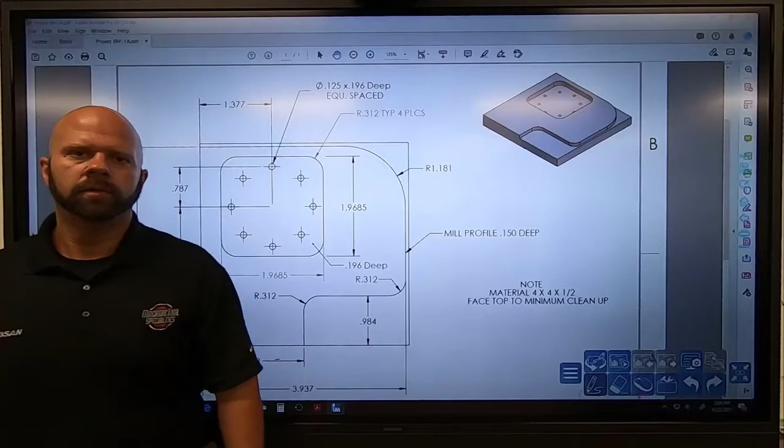We'll be covering all three lectures from our Blackboard: how to start the program, how to do the facing, the profiling, the pocketing, and we're going to go over holes. For the hole locations, we'll use the third method for trigging out the hole locations. Once that's done, we'll have all our code, and I'll show you how it should look when it's all run.

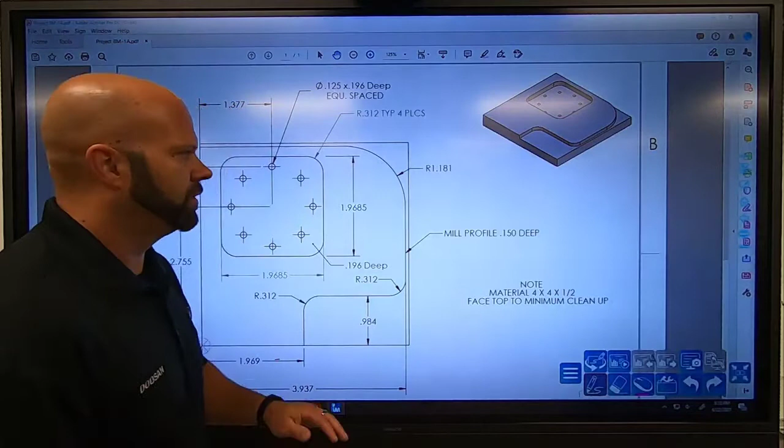So what I'm going to do right now is show you what we're going to be making. I'll teach you how to take this part and program all the tool path. We're not going to do the excess, and I'll explain what the excess is here in just a minute — I'll let that be up to you on how you want to do that.

We're going to take a standard program and go over how to face the part, then I'll give you a safe start location on how to profile the part. After profiling, I'll teach you how to safely enter the pocket with a ramping style — I'll be using the zigzag ramping style — and then I'll show you how to trig out the hole.

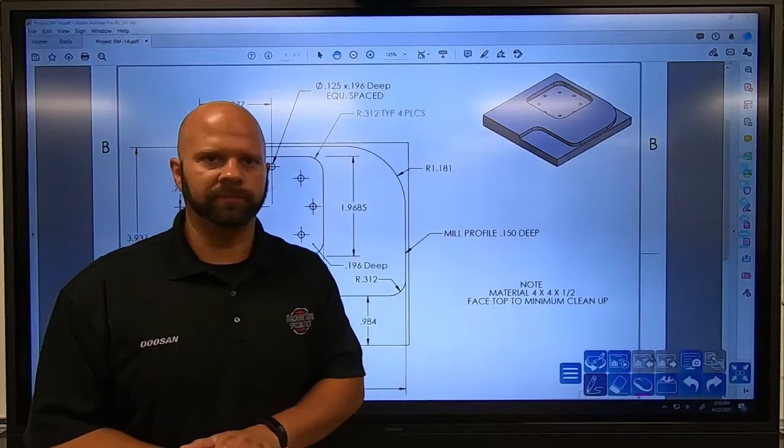All of these will be found in your programming workbooks, and examples are also found in the other lectures, so you can use this as well. Yes, you will find all the answers to your program, but please use this video as reference to help you understand how to program, because the next part you program there won't be a video for.

So let's get started. The first thing I want to do is take, we'll say, a 3-inch face mill, and go ahead and go across this part at Z0.

The first thing I want to do is come to my part and start at the percent sign. So the first thing I have at the top of my program will always be a percent sign.

What that does is let the controller, when you input your program, know it's looking for a percent sign — not a space. The first thing you have at the top of your file is a percent sign.

So this next code can be from 0001 all the way — I'll put this in parentheses — all the way to 7,999. The reason why is that 8,000 to 9,000 programs are usually protected programs in your machine, so I don't want anybody using those. So I'll go ahead and erase that.

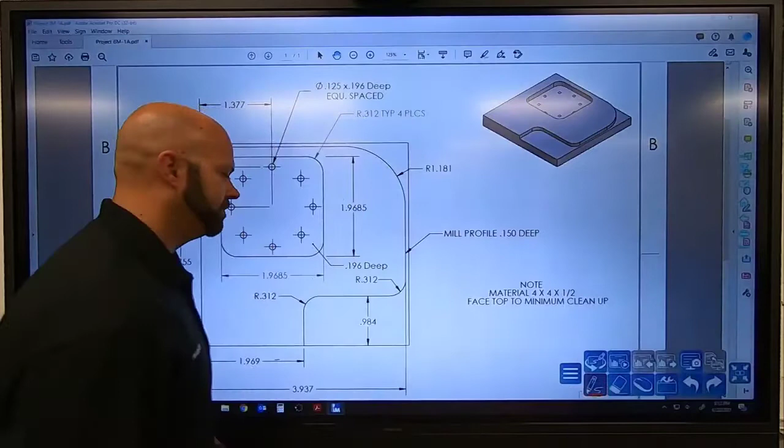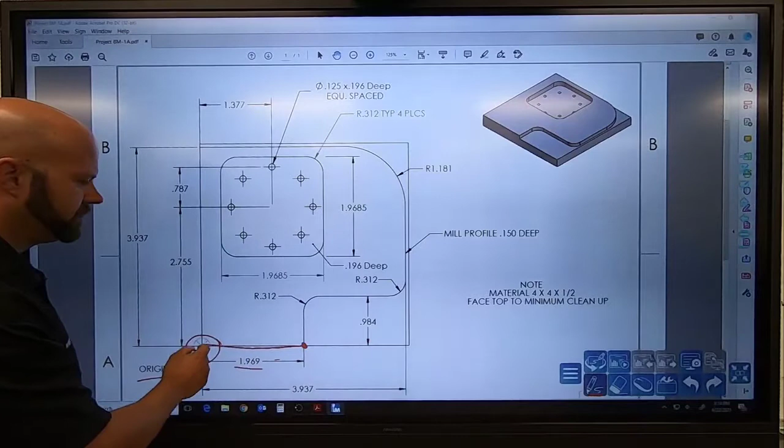Let me show you why I picked that location. If you look here, you'll see I have an origin — that's where all my dimensions are coming from. For example, if I wanted to come to this location in X, I'll move that dimension over, because that is the location of this point in relation to origin. That'll make sense as we go along.

Back to here, I'll also put in parentheses: Z0 top of part. Now if you're thinking, hey, if Z0 is the top of the part and I go across it at Z0, I won't take off any material...

I will also show you what to do from there. So I've got a pretty basic start here. I've got my O number, I've got my XY0, which is the bottom left corner of my part, and I got my Z0 as the top of the part.

That helps me as I'm programming it, and it helps the operator when they're setting it up. So the next thing I want to put on there is I want to go ahead and call up the tool. However, what I usually like to do in my programs is I give it an M01. What that does is it tells the machine to stop, and it lets me know what's going to happen. So M01, I'll put a tool description. I said a 3-inch face mill.

3-inch. Remember, see this decimal right here? Do not forget about your decimals and their locations, because that can make a big difference. I will also explain that. So I'll just put face mill.

And then I'm going to start giving my machine a lot more codes. Here's where you want to start paying attention, all right? This is kind of a basis, but the next few lines I'm going to show you are the several lines that you'll have at the beginning of every tool.

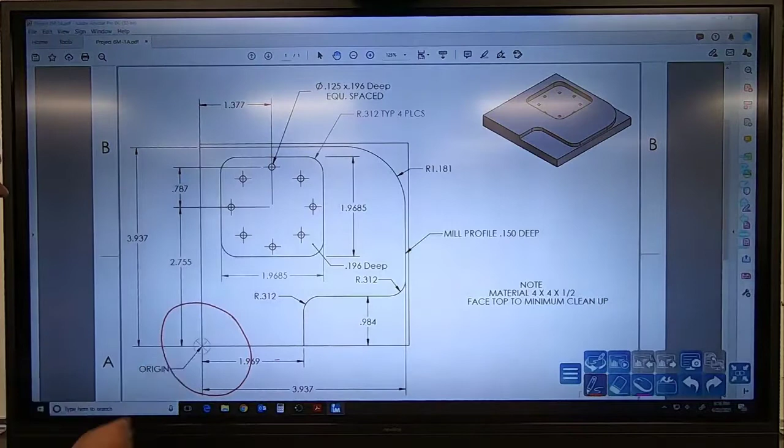Then from there, I'm going to go ahead and I'm going to send it to a location. Now, where am I going to send it? I have a 3-inch face mill. If I send it to XY0, it's going to put the center of my tool right over the top of it. So when I come down on top of it, it will slam on top of my part. I don't want to do that.

So this would be Y. See if it'll let me write on there. This will be Y plus direction going up. This will be the X plus direction going that direction, all right?

So that means I want to put my tool in the X negative direction by more than half the diameter of the tool. So if it's 3 inches, 1 inch 500 thousandths will put the side of my tool right there, okay? So I can also come up. So I'm going to move it up 1 inch as well. I'll move it up about 1 inch. That way I can do this part in 2 passes. I know that it will clean all the way up, okay?

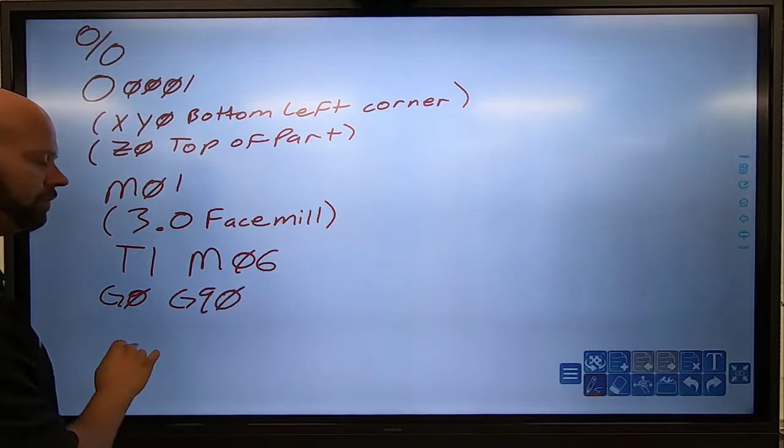So the next thing I'm going to do is I'm going to go rapid G0, absolute G90. We will always program in G90. My work offset, which is my origin location on the machine, and then I'm going to go in X minus 1.5, but maybe I want to go more than that, okay? So I'll just make that 600 thousandths. That way I still don't come down right next to my part.

And then I'll put a Y of 1 inch. If I go 1.5, there's a chance that the bottom of my part might not clean up. So I have a 1/2 inch overhang. That'll make a lot more sense as you see it run, all right?

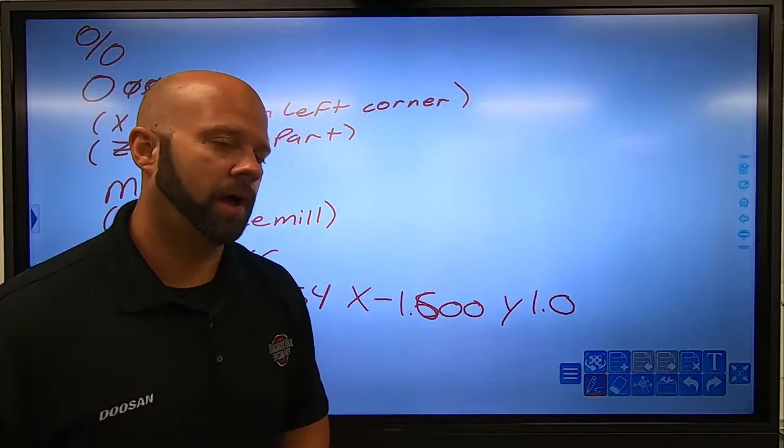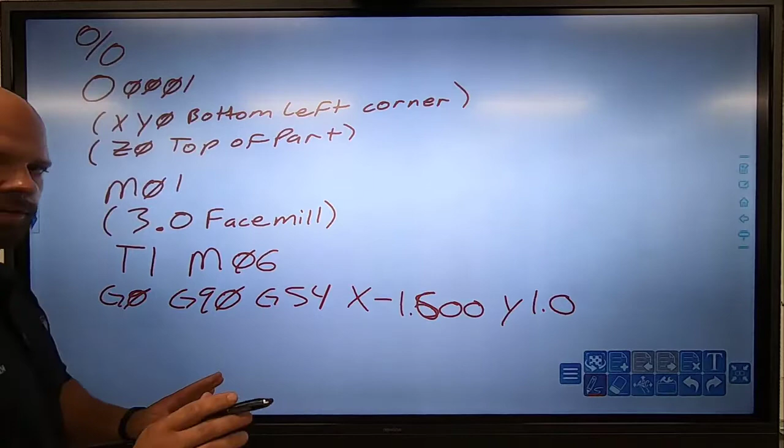So the thing I like to teach people is I've almost got all my starting points. So I'm gonna go to that location, and on this location line, it's up to you. I can turn on my spindle and tell it which direction I'm going, or I can put it on a separate line. For most examples you'll see, the spindle speed goes on this same line. So I will turn this on at 3,000 RPMs, and I'm going to turn on M03. That is a clockwise rotation.

The next line I'm going to put on there is my tool now knows where to go in relation to my G54. Now it needs to know how high above the part it needs to go. So it needs to pick up its tool length offset, and to activate the tool length offset, it is a G43. My H has to match my T, so H1, I'm going to give it a Z 1 inch above the part. That is a safe location for beginners. If you want to go 3 inches above the part, you can do that as well.

And then on this same line, I want to turn on M08. And of course, like I said, you'll see me forget those lines right there. Just always remember, no more letter O's in my program. So what you see right here is how every tool should look when it starts.

So even if the next tool gets done, I'm going to send the tool home. M01, tool description. Call up the correct tool, rapid it to a safe location.

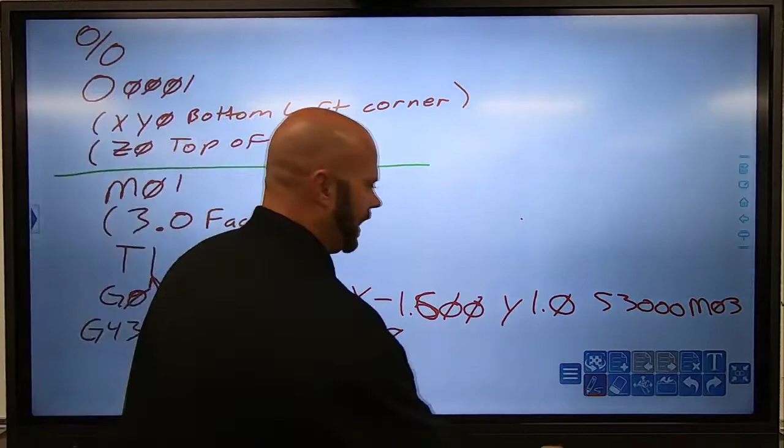All right, so here we go. I've got the beginning of what I want to do. This is how every tool will start. I'm going to go ahead and move my page up.

So right now, to give you an example of where we're at, I have a tool, my 3-inch tool above my part, okay? Obviously the tool's not to scale. So right here, that's where I'm at. I'm 1 inch above the part. Now from here, I want to lower down, 3 inches above it or 1 inch above it.

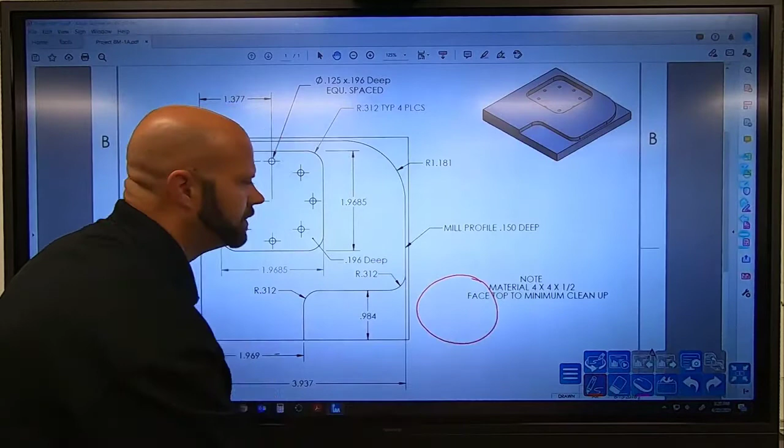I rapid in, now I want to feed to Z0. Once I'm at Z0, I want to move my tool completely across the part. So that G code will be G01. That puts me into a linear interpolation mode, pretty much making straight lines, okay?

I'm going to go Z0, and every time I have the initial G01, not every line, but the initial G01 when a tool starts, I want a feed rate. So I'm going to put a feed rate of 30 on there, and it's going to go into feed rate mode, so no more rapid. I'm going into feed rate mode to Z0, okay?

So now here's where we're going to go kind of fast because I want to get this program done. I'm going to move over off the part, so that will be an X plus move. My material is 4 inches plus 1.5 inches to go completely off the part. So that will be an X 5.5 inches. From here, I want to move up.

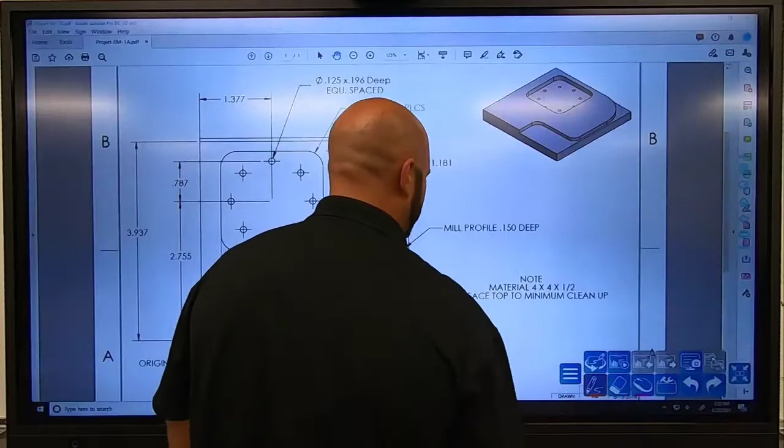So I will go a Y plus move, but how far do I want to go? I'm already taking off 1 inch off of a 4-inch piece. So I want to go up just enough to where it takes off, okay? So if I come back over here, I'll draw my tool. I've gone up 1 inch, okay?

So if I come up, I'm going to take my tool and I'll go ahead and put it up here at the edge. The reason why I'm doing that is because I know my profile tool will clean up any excess that I leave there. So I will simply come up from here.

I'll come up, let's say 2.5. So 1 inch plus 1.5 inches equals 2 inches, 500 thousandths. So I'll go Y, 2 inches, 500 thousandths. And then I'm going to come back across my part to where I started, which was X negative 1 inch, 600 thousandths.

Here's the best part. My facing is done. With these 1, 2, 3, 4, 5 lines we have right here, actually just like 4 moves, we have actually faced the entire top of the part.

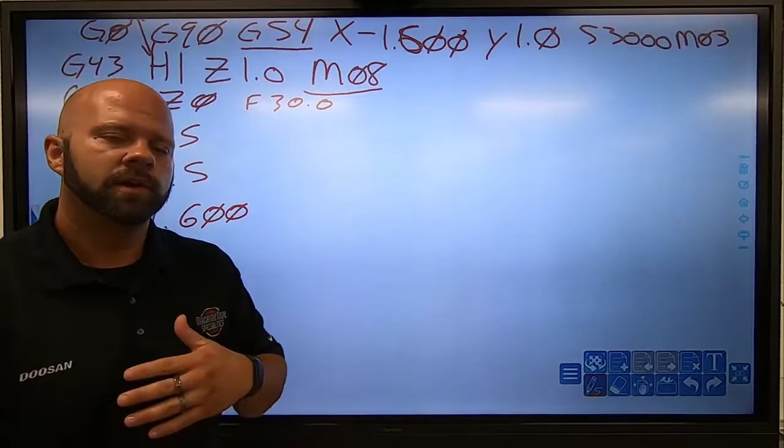So now when I am done making a part, I want to send it home. Now there are lots of ways to do it in your books. I'm going to teach you a way right here that will work on every machine that you run on, okay? So I'm going to teach you this right here. Let me scoot up a little bit.

I will go into rapid mode, okay? That means every X and Y move after this will be a rapid mode. G0 Z 1 inch, M08. I am now 1 inch above my part.

Now I'm going to go G91, G28, okay? From where I'm at, home location, I want to go Z0. G91, G28, Z0. That sends me straight home where I'm currently at. The very next line will be G53. That is the machine's location. I'll explain that later.

G53, G49, and then that's going to cancel off my tool length, and then I'll type in—and that should have been M09, I do apologize. Let's erase that. M08 turns it on, M09 turns it off. So I have that right there, and then the last thing I'm going to do is I'm going to put an M05.

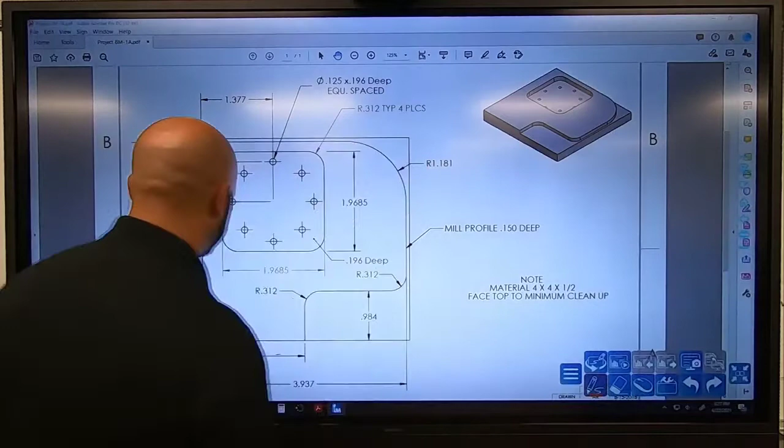Now on this one, let's kind of see where we want to put this tool at. For example, I have a tool, of course it's a lot smaller because it's a 1/2 inch tool and not a 3 inch tool. Looks about the same size.

But I don't want to start at X0, Y0, because when I come down, I will take out my part. Even if I'm feeding down to Z0, it will touch the top of the part. And if I feed below Z0, it will go across the part. So what I want to do, and the way I teach it, is I tell everyone to come off the part 1 inch total.

So I want you to come off an inch in X negative. I want you to come down an inch in Y negative, okay? So what that does is it puts me in a safe location so that I do not come off the top of the part. This will help for visualization when you start programming your part.

So what I'll do is I will go X negative 1 inch, Y negative 1 inch, and then again, I can turn on my spindle from this location. So let's go 4,000 because it is a smaller tool. And M03, it will always be an M03 unless you're using a left-handed tool. So M03 will turn on my spindle in the clockwise direction, all right?

So I have all my variables here. I'll go G43, I'm going to go H. My H and my T have to match. You can put a 2, you can put 02, but you cannot put 20 because then it thinks it's tool 20's tool length. We'll go Z, 1 inch above the part.

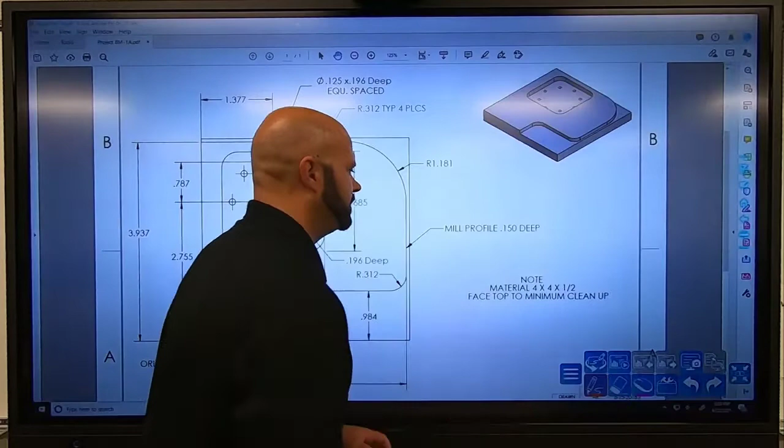I will come down. Now here's the thing: I don't want to come down to Z0 because I'm not facing off the part. What I want to do is come down 50 thousandths maximum depth of cut on this part right here, okay? That means I have to do 3 passes around this profile for me to be at the correct depth.

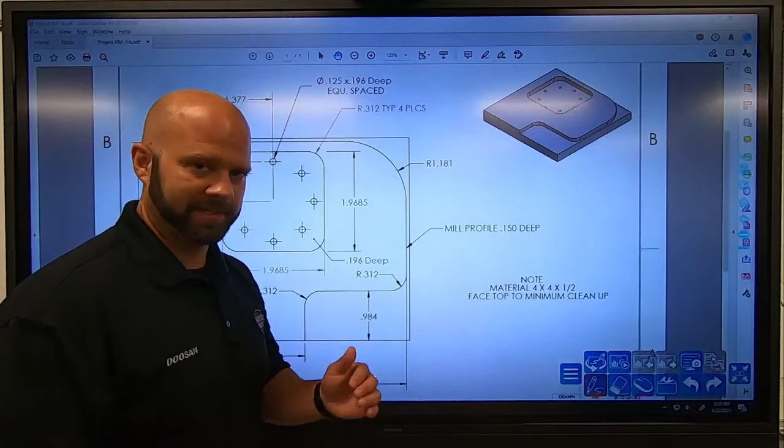So I don't want to start at Z0. I want to start at my first profile depth, which will be a Z negative 50 thousandths, because now I am below the top of my part. So Z will be a negative 50 thousandths.

Remember to put your decimal there, and remember that you have the numbers correct. The way I like to show people is to the 3rd place decimal. If you hide the decimal, that is 50. If the 5 was there, it would be 5. And if it was 500, it would be 500. The decimal makes you say thousandths. So that's how I have people learn, is by doing that right there.

So then I need, this is the first G01 that the tool has read. I'm going to put a feed rate, we'll say 50 inches a minute. So I've got my G01, I'm 50 thousandths below the top of the surface, and I'm at a feed rate of 50. So here's where stuff's going to get kind of tricky.

If you need to, pause and do a recap, because we're going to go over one of our first lectures, which is using cutter radius compensation. We have to turn it off if we turn it on, and in this case we're going to be moving more than the tool's diameter when we turn it on. If you have not watched those lectures, I need you to go watch them right now.

So what we'll do is I have my tool. I'm currently right here. So here's that rule of thumb I put on that last video, is when I turn on cutter comp, I am moving towards the line I am about to cut. I'm about to cut this line.

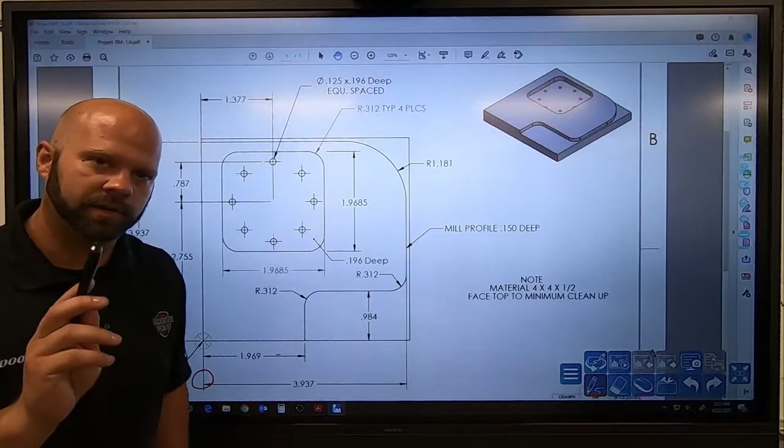But because we are turning on cutter comp, X0 will put the tool right there, because it's going to keep it half the diameter of the tool away from the line to cut. That's going to take a little bit to sink in, so don't expect it to just happen overnight with your understanding.

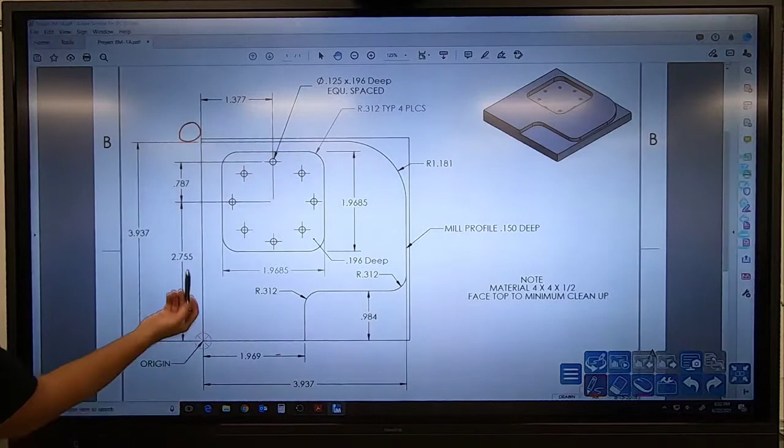Some people it will, some people have to watch the video a couple times. Don't worry. Just know that because cutter comp is on, I do not have to add a bunch of numbers everywhere. If my print says to move 3 inches 937 thousandths, that is what I'm going to type in. So the first thing I want to do is turn on cutter comp, and I want to move to a Y positive 3 inches 937 thousandths. So let's start there.

So I'm going to turn on G41 because I'm going to stay to the left of the line that I am cutting. Okay, that'll take some time to sink in as well. So, G41.

X0, D02. Now D02 is just like the H, and it's just like the T. So something to remember when you're using G43, you have to have the H on there. When you're using G41 or G42, you have to have the D. So remember, when you're typing these in, if you get an alarm, it's probably because you're missing one of those two variables.

So I have successfully turned on cutter comp, I have gone to X0, and I've turned on the radius value. So the next thing I want to do is I simply want to move to Y 3 inches 937 thousandths. That has now put my tool up to the top of the part.

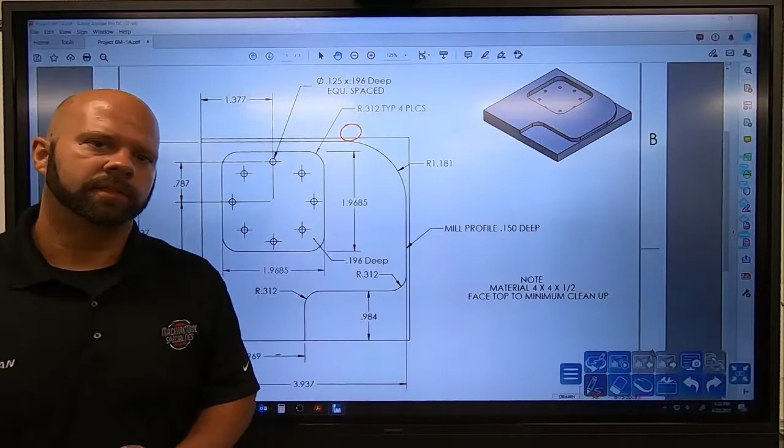The next thing we want to do is we want to go from that location to right there. Now keep in mind, I am at the pivot point on my profile.

Now I have taught people in the past, it's always a good idea before you ever start programming to go through all your pivot points and write down the X and Y location of those pivot points. Now remember, those pivot points are in relation to your G54.

So that means that pivot point that I was just at in Y is 3 inches, 937 thousandths, and it's gonna be up an amount right here, but we don't know what that amount is yet. So we have to figure out what that missing dimension is.

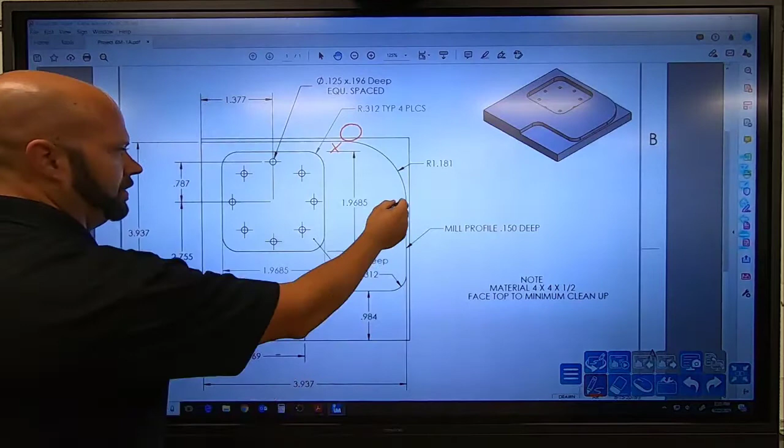So right here, my X value for this is going to be a known location in X, and I'm going to subtract this radius right here. The radius, I do know what that is. It happens to be right there on my print. So that means my X location will be 3 inches, 937 thousandths minus 1 inch, 181 thousandths.

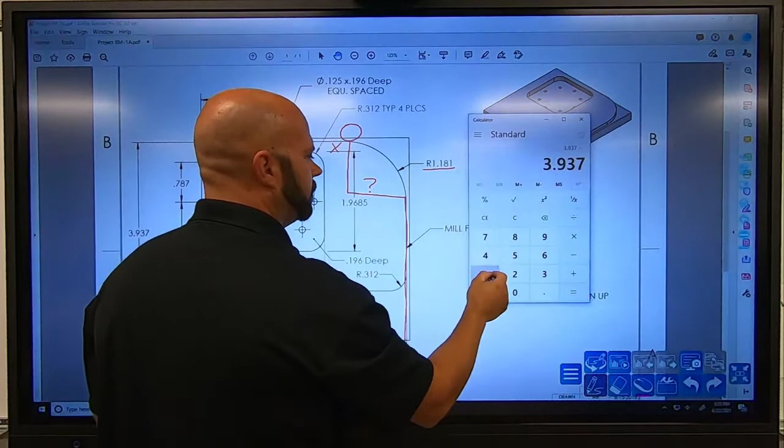So if we grab our calculator, we'll go ahead and type that in. So I'll type in 3 inches, 937 thousandths, subtract 1 inch, 181 thousandths equals 2 inches, 756 thousandths. So that would be the X location for right here. So I'll go ahead and I'll type that. I'll do that up here so it's a little bit easier to see. Let's get rid of this because we know what that is now.

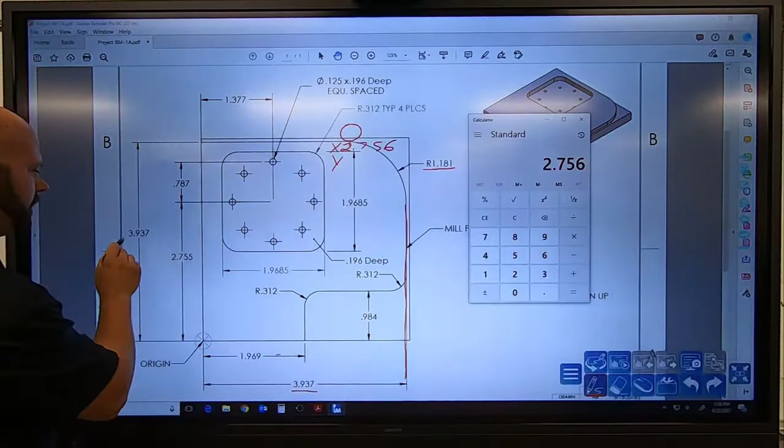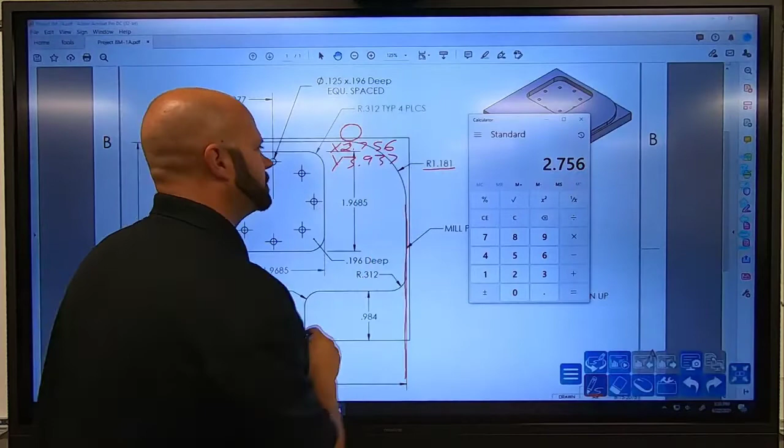X is going to be 2 inches, 756 thousandths. And then my Y is where we already are at, because we are already there right now. We are already at that known location, which means my Y is going to be 3 inches, 937 thousandths. If I'm already there, I do not have to have my Y on that line, because my tool is only moving in X.

Because it's only moving in X, you only have to put an X on that line. But if you have the Y on that line, it won't hurt anything. You just got to make sure that it is correct and that you don't get your numbers backwards, or else it will move to where you tell it to move.

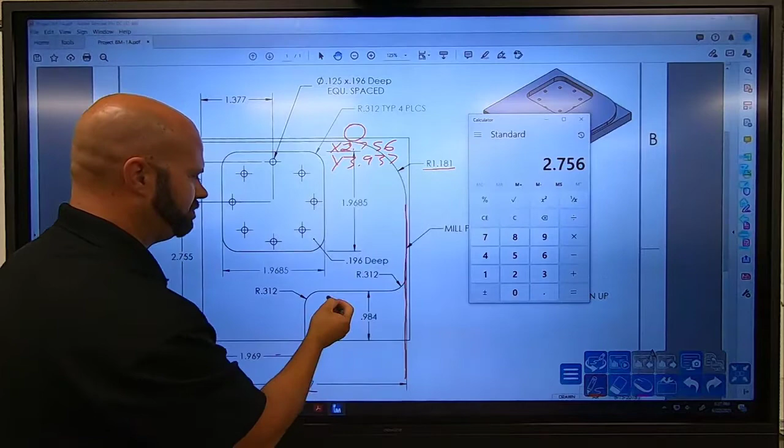Okay? So I would recommend that you go print this off and make a separate piece of paper and write down the X and Y locations of all these pivot points before you even start.

Okay? So all I'm going to do to keep it clean on my board is I'm only going to move, if I move in one axis, that one axis. So I'm going to move X 2 inches, 756 thousandths.

Now remember, these are linear interpolation moves. They're all straight lines. So if you want to, you can put a G01 on every line. But G01 is what we call a modal code, and that means you don't have to put it on every line. Once it's activated, it stays activated until you turn it off.

Now remember that, because I'm about to make a G0, 3 or 2, and we got to figure out what that is. So we'll come back to our part right here, and you'll notice my tool is going to move from here to there. That is making a clockwise rotation move, and clockwise is G02.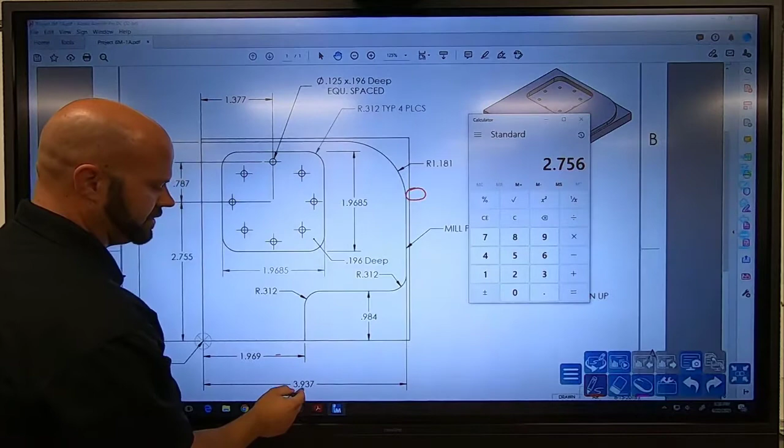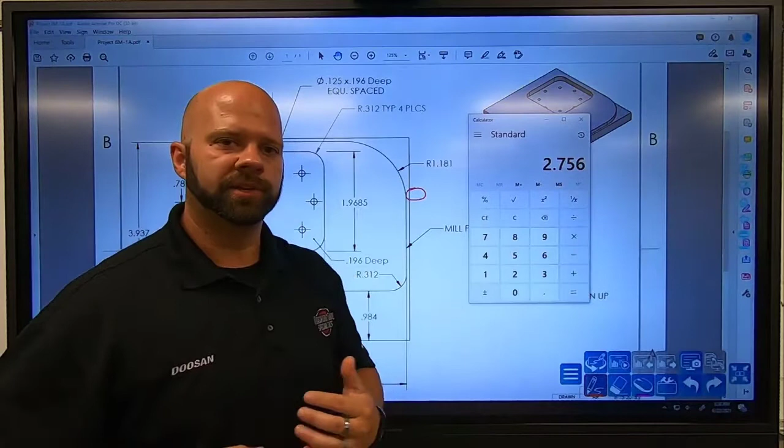Now here's the cool thing. I was X and Y up here. My Y was 3 inches, 937 thousandths, but now it's an X 3 inches, 937 thousandths. And now my Y is smaller. So my numbers have actually flip-flopped. It won't always work that way, but it's good to get that idea that I'm going from a known location, subtract the radius, puts me at my next X and Y location.

So I'm going to write that down, but before I do, once I complete this G02, I'm going to make a straight line, which means I will have to put a G01 at the beginning of the next line, or else it thinks that it's doing circles and will give you nothing but alarms, okay?

So I'm going to put a G02. My X will be 3 inches, 937 thousandths. My Y will be 2 inches, same one as my last one, 756 thousandths. Now on a G03 or a G02 line, you have to have the R, and the R equals the radius, and the radius was 1 inch, 181 thousandths. So if I had left the R off, it would have made a straight line, even though it has a G02 on there, and it would not have alarmed out.

However, if you put the R on there and not the G02 or 3, it will alarm out. So remember, they go hand in hand. If I have a G02 or 3, I have to have the R. So again, my next line will be a G01.

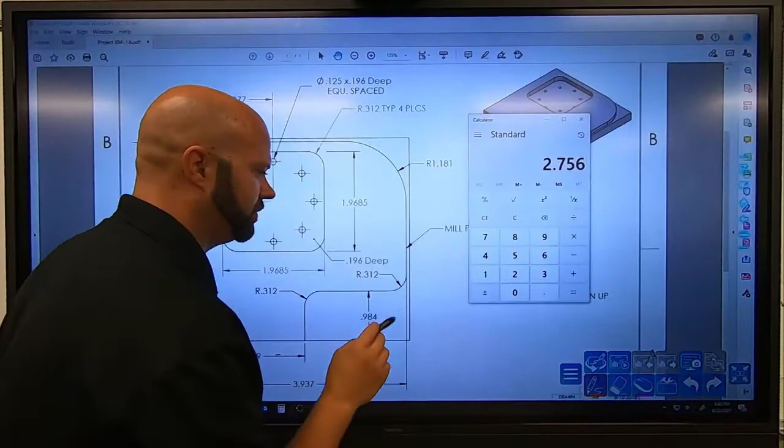And we're going to be moving down in Y, but we're not going to be moving negative. Okay, this is going to take a minute for it to sink in, but I am moving down in a negative motion. But remember, Y0 is this plane right here. So I am still in a positive quadrant. I'm still in a positive quadrant until I go into the negative quadrant.

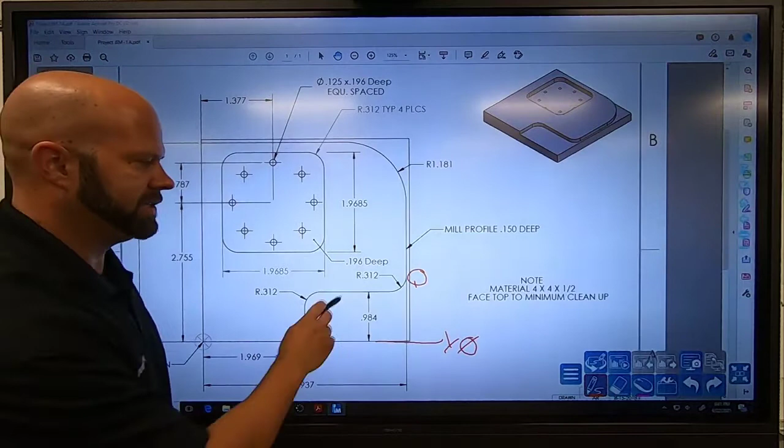So all moves right here will be a Y positive motion. So we're going to move right there before the radius, because that is a pivot point. Okay, we don't start at the bottom of the radius. You don't put the 984 in there. We're going to have to put that right there.

Now remember, this should be catching on pretty good now. I'm going to put the known location, which is my distance from here to there, and then I'm going to come up my radius, which is 312 thousandths. So I'll pull up my calculator and we'll type that in. It's going to be 984 thousandths plus 312 is going to be, that is my Y location.

Notice how it is in the plus direction. That is how I will plug it in. So G01, Y, 1 inch, 296 thousandths. You have to get this number right within 1 thousandths, and your swing value on the G02 and G03s within 1 thousandths, or it will alarm out on you. You cannot round to the nearest 10 thousandths.

Okay? So the next thing I'm going to be doing is I'm also going to be swinging a radius, but are we swinging a G02 or a G03?

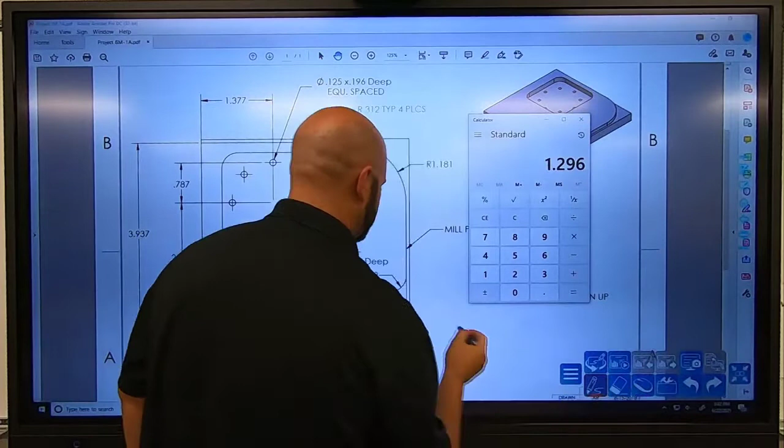So I will draw my tool, and if you'll notice, I'll be swinging in a clockwise direction around my part. So right there, I'm going to be swinging around my part, and then I can see that I'm going to be making another straight line, and I've got a pivot point right there. So that's where I'm going to be stopping.

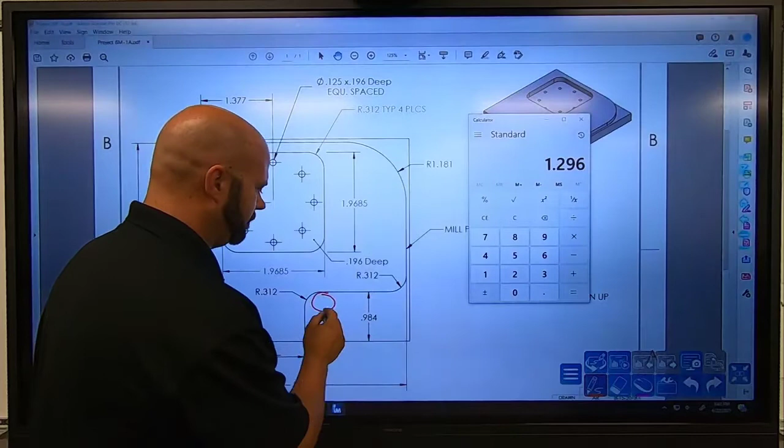So what I need to do is figure out, I know what my Y will be. My Y will be 984, but my X will be a known location from where I currently was, minus the radius of that. So let's find out what that is. I'll type in where I currently was, which was 3 inches 937 thousandths, subtract 312 thousandths, equals 3 inches and 5/8, 625 thousandths.

So we're going to be swinging a G02. My X will be 3 inches 625 thousandths. My Y, we had that known location on the blueprint, was 984 thousandths - make that more like a 9. There we go. So I also have to have, what on here? If I have a G02 or G03, I have to have the R. The R has to match what it was on the print.

Okay, you can't put 1 inch 181 for every radius. So this was 312 thousandths. Now I was in a G02, which is a modal mode. Now I have to go back to a G01 modal mode. I'll be making an X move. So let's find out where I'm going to be putting myself. So that's where I was.

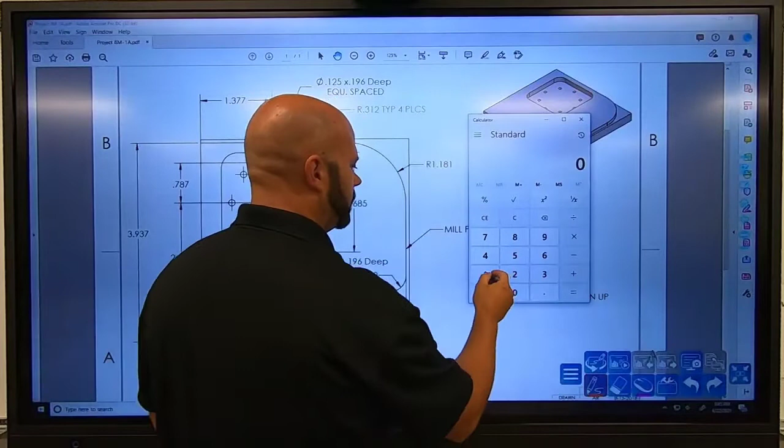Now I'm going to move to my next pivot point. My next pivot point in X will be 1 inch 969 plus the radius, or plus the dimension of my radius, which is 312 thousandths. My Y will not change, so my next line will simply be an X positive move because I'm still in the X positive quadrant. All up here is positive, positive, until I go into the negative, negative quadrant. So right there will be 1 inch 969 thousandths plus 312 thousandths, 2 inches 281 thousandths.

So my X will be 2 inches 281 thousandths. Let me make sure I type that in right. Very good. So after this line, I'm going to be making a G0 move, but let's find out if it's going to be a 2 or a 3. So I'll come back here. If you'll notice, now I'm swinging the other direction. I am making a counterclockwise motion, which will be a G03 move.

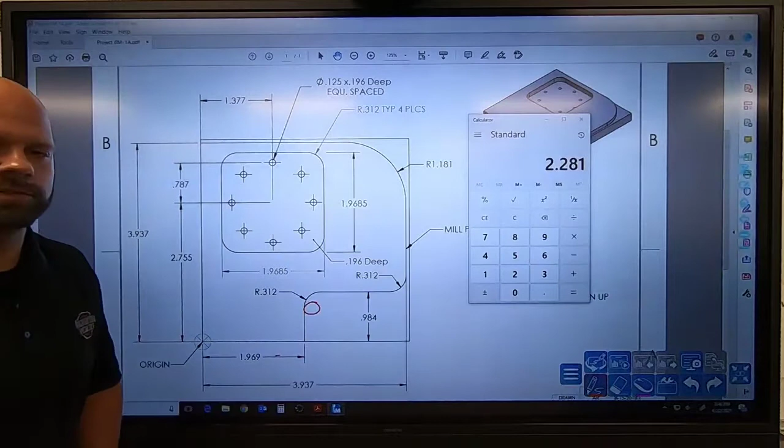So we know what the X is going to be. The X is on my print, but my pivot point for this position will be 984 thousandths subtract the radius, because I'm going here to there. So I'll go ahead and type it in. 984 thousandths subtract 312 thousandths equals 672. So that's what my Y will be.

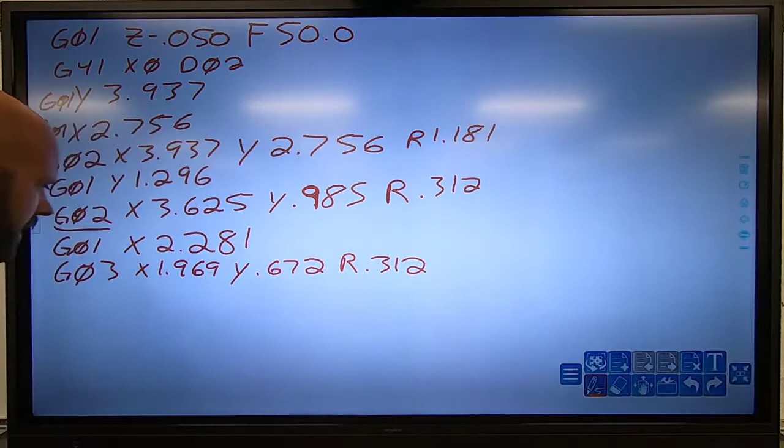So again, I'll be swinging a counterclockwise rotation, and then I will be going to X 1 inch 969 thousandths, and then I will be doing a Y of 672 thousandths. Notice how I'm still in the plus area, and I have a G03, and a G03 needs the R, 312 thousandths.

I know my next line is a straight line, so I can go ahead and put a linear interpolation modal mode code. At this point it gets pretty easy. I'm going to move my tool from right there to Y0. Now remember, without cutter comp on, that is Y0. On your offsets in the diameter column, if you have nothing set there, that is also Y0. You have to have cutter comp on, and you have to have your column set correctly, which I will show you.

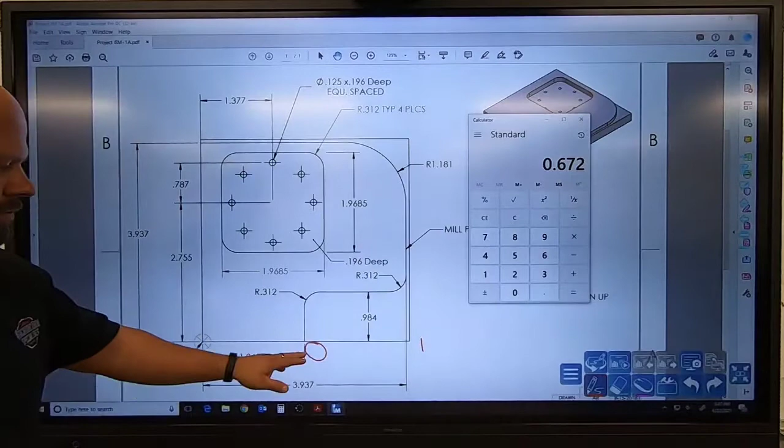So when I type in Y0, it will move to the center line, and then it offsets, cutter compensates half the diameter of my tool. So when I type in Y0, it will put it at the right location. So I know my next move will be Y0. I'll move this up so we can see a little better.

Now in here, I'm already at this bottom area, and what I teach is I want everyone to go back to where they started. This is going to be a closed loop profile. That will make sense, and it's very helpful once we get going. So I'm going to move all the way over here, back where we started, which was an X negative 1 inch. So I went all the way off the part, a negative 1 inch.

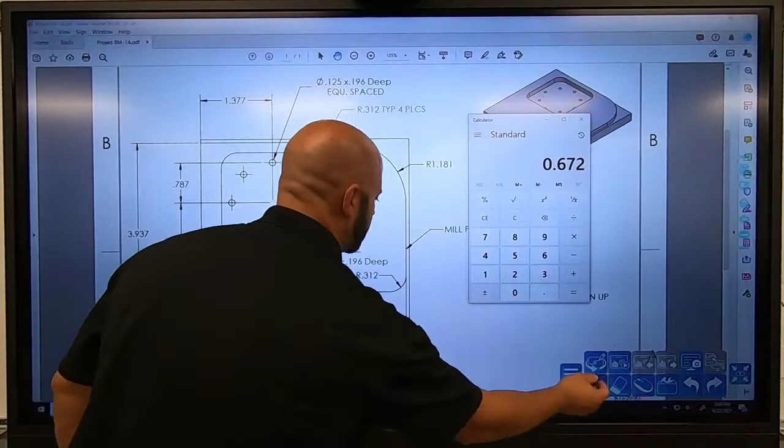So now I'm going to go X. Notice I didn't put a G01 on there because I'm making another straight line, and linear interpolation is already active. So X negative 1 inch, and then I've got something else going on here. I'm going to put it back to Y minus 1 inch.

Okay, but I'm missing something there, so I've got to find out what I'm missing, because I'm going to turn off cutter comp. In order to turn off cutter comp, if you'll watch the video before, I have to turn it off moving away from the line.

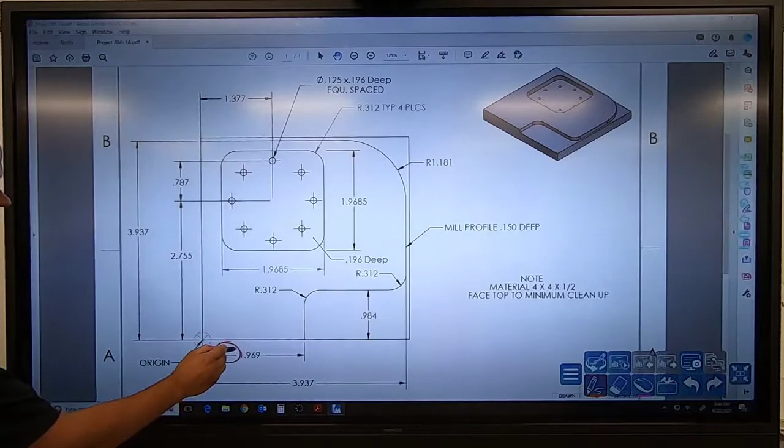Well, I'm having a hard time here, I apologize. There it goes. So I have to move away from the line I just cut. So I just cut this line, and then I'm going to turn off cutter comp, moving perpendicular away from the line I just cut. So I moved Y negative 1 inch.

And then I'm also going to be going G40. G40 and the Y need to be on the same line, because you want to move the diameter of the tool while moving away from the line you just cut.

So here's the good news. All this code that we just did, that's a lot, okay? So if you need to, you can take it back and watch it again. But if you'll notice, we did all of this code, this profile, at a minus 50 thousandths. So at this point, you can take this and pop it into your simulator and see if it runs correctly. If it runs correctly, you can move forward.

What I'm going to show you by moving forward is I want you to make this closed profile 150 thousandths deep, but I still have to go around it 2 times. So I don't want to write all that line of code twice. So here's where using a computer comes into play.

So from here all the way down, and I'll make my line a bit longer, to my G40, I can copy and paste, and I can put all that right below my G40. And then all I would do is change the Z to negative 100 thousandths.

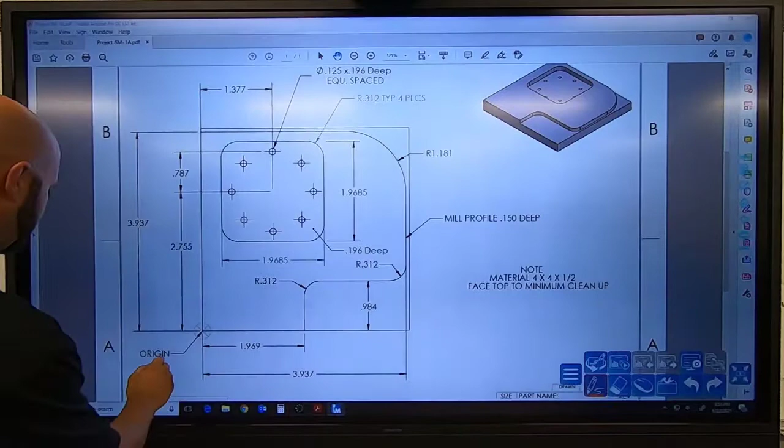If I was done using that tool, okay? But here's the thing, I'm going to use that 1/2 inch tool to go around my pocket. So I'll take my tool, which was right there.

And I'm going to position it right there. So I'm not going to send it home. I'm just going to come 1 inch above the part, and then I'm going to move to this location right here. However, this location - this will make a lot of sense as you do it - is going to become my new origin, but it can't be G54 origin, okay? It has to be a different work offset origin, which is G55. So G55 is now the center of my pocket.

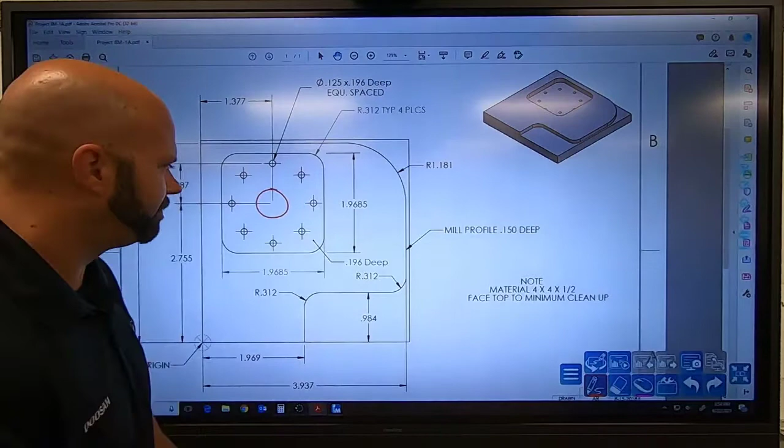So which means whenever I turn on cutter comp, I simply have to move the exact amounts that I want to move and it will work out just fine. So with that said, let's go ahead and go back to our code and adjust it accordingly. I'm going to erase because I don't want to use it yet, I don't want to send it home yet.

Okay, I want to go to the next tool or the next work offset. So I'm already in Rapid, but I usually type it in anyway because it's a good habit. G0, G90... wasn't very good. G55, okay? X0,

Y0. If I did not give my G55 the work offset and put it in the center of the part, you would have to add the difference from origin on G54 to the center of the pocket and then add that to your move. And it can get confusing really fast. By doing this, it lowers the confusion and it really does make it easier once you get used to it, okay? Once you get the hang of it.

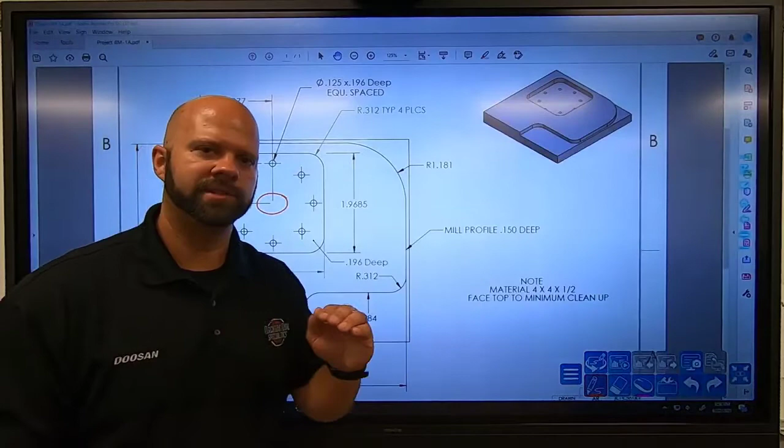So right now I have put my tool 1 inch above the part and I put it to G55 XY0 in the center of that pocket. So from here, I want to go ahead and ramp my tool. Now remember, this is the second lecture that we went over. This lecture is how to ramp safely into the part. So what I mean by that is I want to grab this tool and I'm going to zig, zag into my material. And as I'm zigging, zagging into the material, I'm only cutting with the edge of the tool because I can't plunge straight down. So watch that video if you need more explanation.

So on here, I'm going to feed linear interpolation, G01 to Z0, and I'm going to zigzag, and then I'll make 2 small squares, and then I'll make my finished profile, okay? So what I'll do from here is I'll go G01, Z0, that's the top of my part, and let's feed at a feed rate of 30, okay? Then I'm going to go zigzag, which means I'm going to move more than half the diameter of my tool. So I'm going to go X, let's say 300 thousandths, and then I'm going to lower down in Z negative 25 thousandths. That's my zig, okay?

You do not have to write that on your program, it's just for visual reference. And I'm going to come back to X0, which is the center of my pocket now. And I'm going to go down another Z negative 25 thousandths, but because we're in absolute mode, it's going to be my zag. I am now 50 thousandths, I'm absolutely 50 thousandths below Z0. So that means X0 back there. So now I'm 50 thousandths in my part. I'm safely in my part.

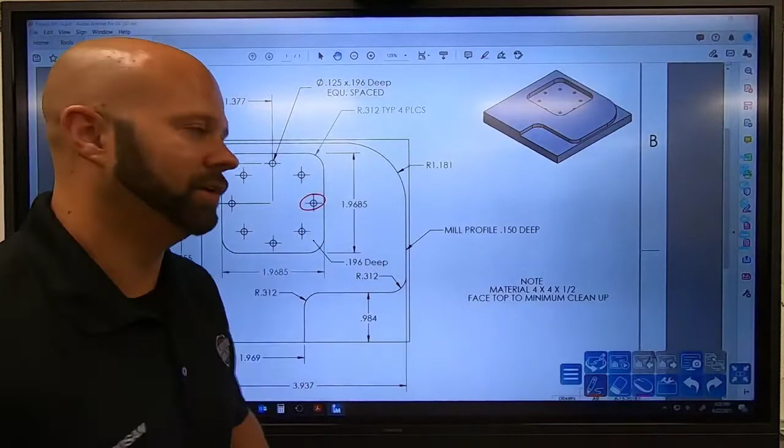Now I'm going to start making my pocket. So what I'm going to do is, because I've already got my tool and I know that I can safely move 300 thousandths, I'm just going to go 300, 300, 300, 300 back to 0, and then I'll move a safe distance over. I'm going to say 5/8 will work out pretty good, okay? So I'll go 5/8, 5/8, 5/8, 5/8, 5/8, and then I'll be done, okay, with my pocket.

So let's move up my part, because we know we're 50 thousandths in the bottom of my part. And then I'm going to start going X 300 thousandths, Y 300 thousandths, X negative, because I'm going into the negative quadrant now, 300 thousandths, because the center of my pocket is XY0. So if I'm on the left side of the pocket or the bottom side of the pocket, I'm in the negative quadrants. So then I'll go Y negative 300 thousandths, and then I'll come back to X positive 300 thousandths, and I'll come back up to Y0.

Okay, so that was quite a bit, pretty fast, but it's pretty simple. All I did was make a 300 thousandths square, and now I'm going to make a 5/8 square. Okay, so now I'm at Y0. I'll go X 0.625, Y 0.625, X negative 0.625, Y minus 625 thousandths, X positive 625 thousandths. I'm going to go back up to Y0, and then before I turn on cutter comp, this usually keeps me from getting any alarms.

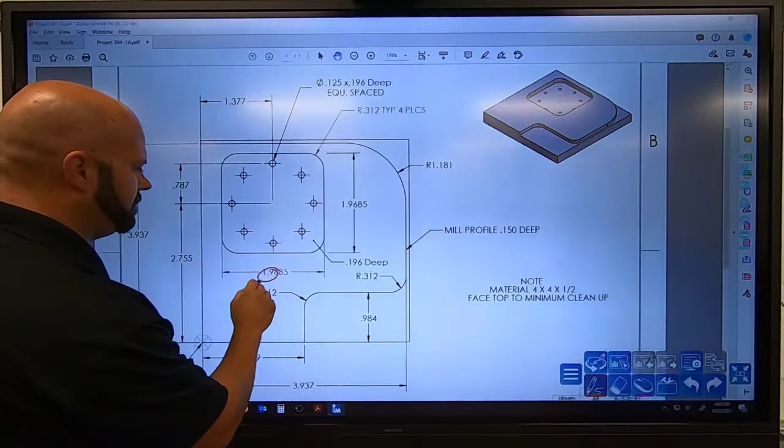Now I'm going to turn on cutter comp, which is G41, and then I'm going to go around this part. However, before I do, this would be a good time to stop and plot the pivot points on this part. Okay, the good news is my part is the same dimension wide as it is tall. So I'm going to grab two numbers and I'm going to plug them in on my whiteboard because I'll need these two numbers as I go around the part. This is where it gets kind of tricky. As I write them down, you'll have to try to keep up with it, and if you can't, just rewatch it and you'll get that understanding.

So what I'm going to do is turn on cutter comp, moving perpendicular to the line I'm about to cut, which is this one. So cutter comp on, and then I'm going to move to my first pivot point.

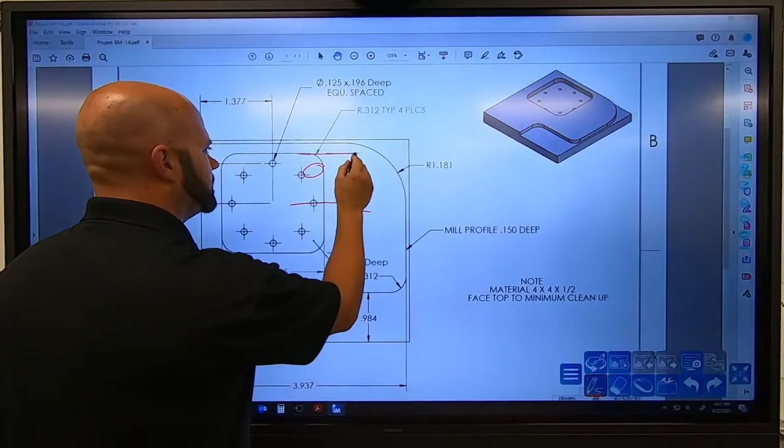That first pivot point is going to be 1 inch 968 thousandths divided by 2, because all I want is that distance, since this is where my origin is right now. So that distance, and then I subtract the radius, okay? Because from here to here, from here to there is that divided by 2, but I'm not moving all the way up there, I'm moving about right there. So that means I'm going to take that number divided by 2, and I'm going to have to subtract the radius.

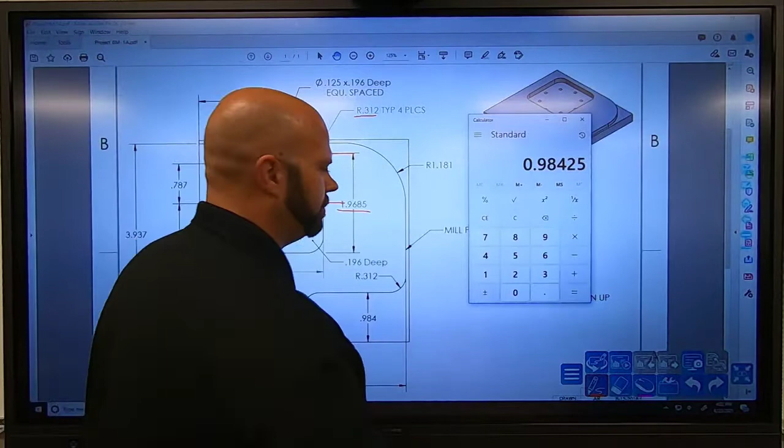So 1 inch 968 thousandths divided by 2. Okay, 984 thousandths. I want to write that number down. 984 thousandths, because that's going to be the top of my pocket, the far left of my pocket, the far bottom of my pocket, and the far right of my pocket.

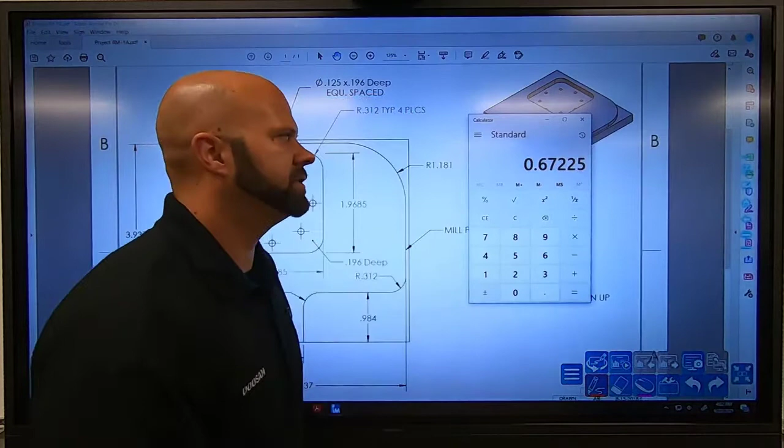Okay, so you do not have to plug in all the way to the last decimal on here. I want you to go to the third place decimal when you're using the simulators. You're less likely to run into error, because if you type in too many numbers, you can go to the fourth place decimal if you want, but if you go to the fifth place decimal, it will alarm out.

Okay, so from here, I want to write down 672 thousandths. So from here, let's turn on cutter comp left, which is G41, and then we're going to start moving to the right locations, okay? Keep in mind what quadrant we're in, and also keep in mind what radius we're swinging. Are we swinging a G02 or a G03? Let's find out.

We'll move this up. Right there looks good. So cutter comp G41 X, I'm going to move all the way to the side of the pocket, which is 984 thousandths. So remember, G43 needs the H, just like G41 or G42 needs the D. So I'm going to put a D, and if you remember, this is still tool number 2. I used H2 at the top. I will also use D2 right there. And anytime I'm using the T2, the H2, the D will also be 2.

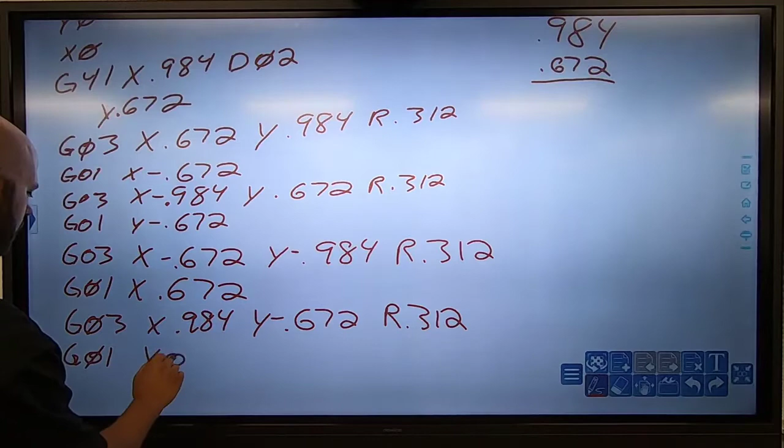So the next thing I'm going to do is go all the way back into my positive X quadrant, which will be a positive 672 thousandths. Then I'll do another G03, which will be X 984 thousandths. My Y will go still in the negative quadrant, but not as big, negative 672 thousandths, with an R of 312. Then the last thing I'll do is come up G01 to Y0. That completes my profile - let's move this up, or not my profile, my pocket.

So here's the thing, cutter comp is on. If it's on, I have to turn it off, and when I turn it off, I have to move perpendicular away from the line I just cut. So let's come back here. We started there, we turned on cutter comp, we went all the way around, and now we're right here at Y0. Now we're going to turn off cutter comp, moving away perpendicular from the line I just cut.

So I'll go G40, X0. Now that I have turned off my cutter comp, I have moved to the center of my pocket. I have successfully made a closed loop pocket. So from my G40 - or I'm sorry, not my G40 - from my zigzag.

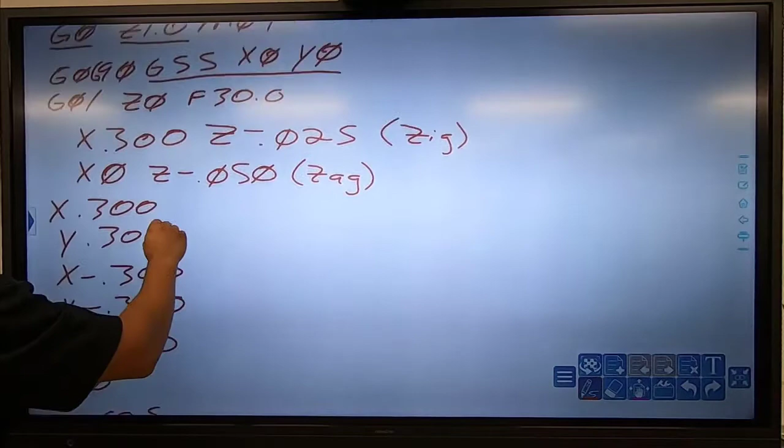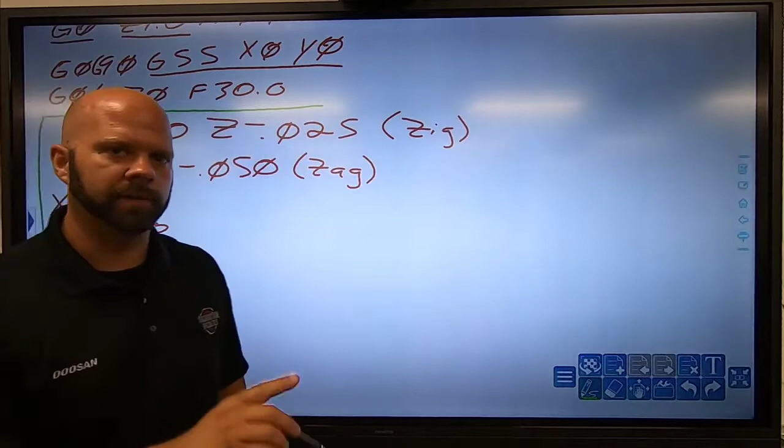So there's a lot of code we got right here, okay? So right here, from my zigzag, okay? Once I run it through the simulator one time and it looks good, I am good to start copying and pasting. Because remember, at the very end of my program, I moved to Y0, X0 and turned off cutter comp. At this point in time, I can zigzag, but my numbers will be different.

I will go 75 thousandths, 100 thousandths. That way I'm 100 thousandths deep into my pocket. So to keep moving this up, I would take all of this, and for visual purposes, we'll grab my line and keep going. There we go. Right there, I would copy all that code and paste it right below here. So I'll just paste.

And then my Z would be a negative 100 thousandths. Then it would go a Z negative - I got my decimal in the wrong spot, let's get rid of that - 150 thousandths. But the next question is, how deep is this pocket? So when I'm looking at my print, I gotta make sure to have all the identifiers here. So if I look at the print, I see that my mill profile is 150 deep, but how deep is the pocket? In this case, it's 196 deep.

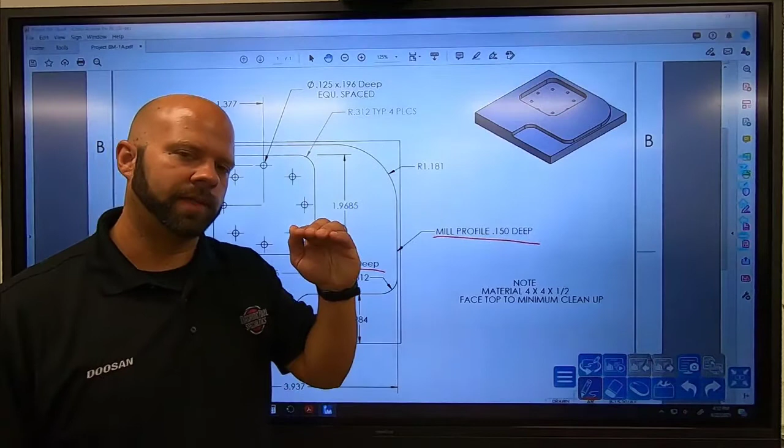So I'll go 50 thousandths, 100 thousandths, 150 thousandths, and then it's 46 thousandths more deep, but from 0, it's a bigger negative, okay? So that means it would be Z negative 196 thousandths, okay? So now we are done using this tool.

I'm ready to send it home, okay? Because there's nothing else I can use this tool for. So I will go into Rapid, I will go 1 inch above the part, and I will turn off my coolant, M09, and then I will do my safe home return, which is G91, G28, Z0 - I'm telling it to go in Z0 only - and then I'll go G90, I'll go G49, this cancels my tool length, and then I'm going to stop my spindle, okay?

So now I'm ready to do my last 2 tools, okay? So let's move this up.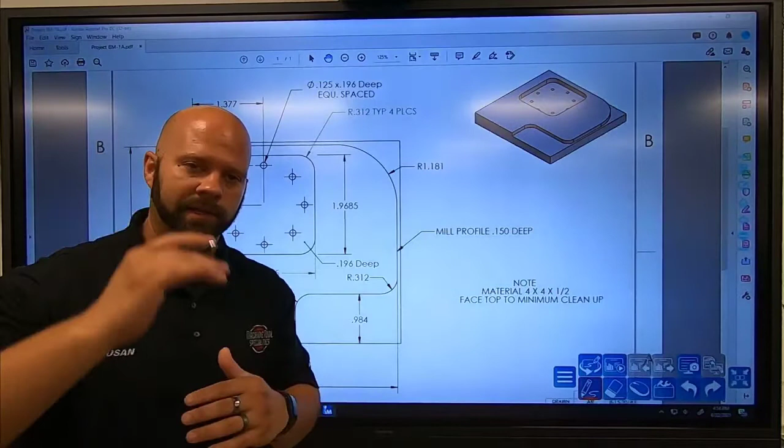So to recap, I have faced my part, I have profiled my part, and I have pocketed my part. And I have run all this through my simulator to make sure it was all right before I keep continuing. Because just like any software program you use, once you create a feature, you want to simulate so you can get all the errors out of that one feature instead of making the whole program and having a list of features you have to fix. It's going to be a lot easier to do if you do it one at a time.

So what I have to look at next is my holes. Now here's where the holes get pretty easy. Obviously, there's certain commands on certain machines that make it easier, but we're going to do it the way that works for everything, which is we're going to trig out the locations of the holes. Now you think trig, you think, oh, this is going to take a little bit. But the way I teach my students is there's always a fast way to do it. And that's what I want to teach because I want to get things done. We're in a high production situation. I want to get these parts programmed and on the machine. So first thing I'm going to do is get my tool ready. That was the last tool that happened. I want to put an M01.

My tool description will be a number 3 center drill. Okay, and then I'm going to go ahead and call up the location of everything. So I'm going to call up my tool, T3 M06.

Rapid for G0, G90 for absolute, G54 for work offset, and then I'm going to go to... oh, it's not going to be G54 though, we're going to go to the center of our pocket. So that's going to be G55. G55 will be the center of my pocket because that's where I want to put my work offsets, okay?

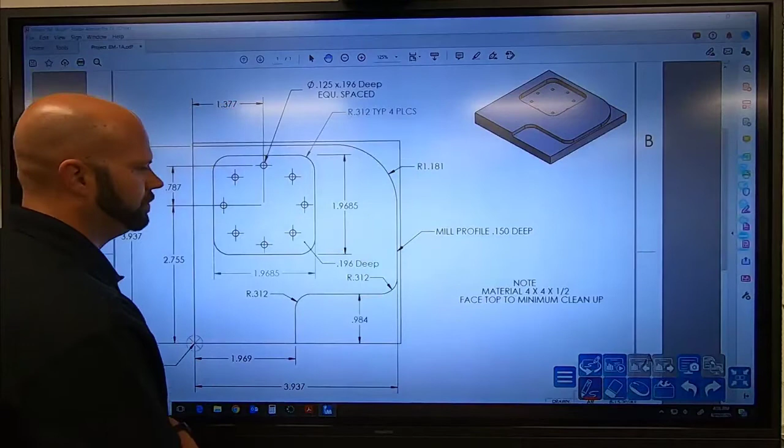So let's go back to our print, let's start doing some trig. So here's what I'm looking for. What I'm looking for is a radius value of my bolt hole circles. So obviously the diameter is all the way across, but what I need is a radius. Now you might get lucky and it will be on the print, okay? That means that is the distance to all the radiuses.

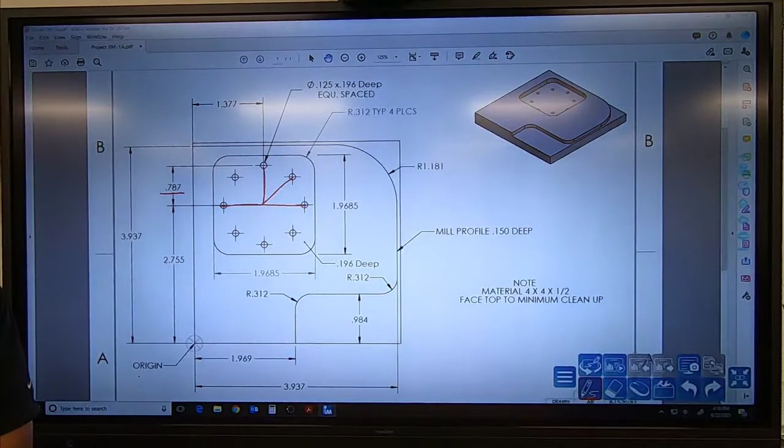Well, in order to do trig, I have to create a right triangle. There's my right triangle. I know my hypotenuse, my little c, okay? Now I have to know my big A angle, or I just have to know any of the other sides, of course, for a right triangle. But in this case, finding out my angle is going to be a lot easier because I know that it is a 360-degree bolt hole circle, and I know how many holes I have in the bolt hole circle. So why does that make it easy? Because I have numbers already there.

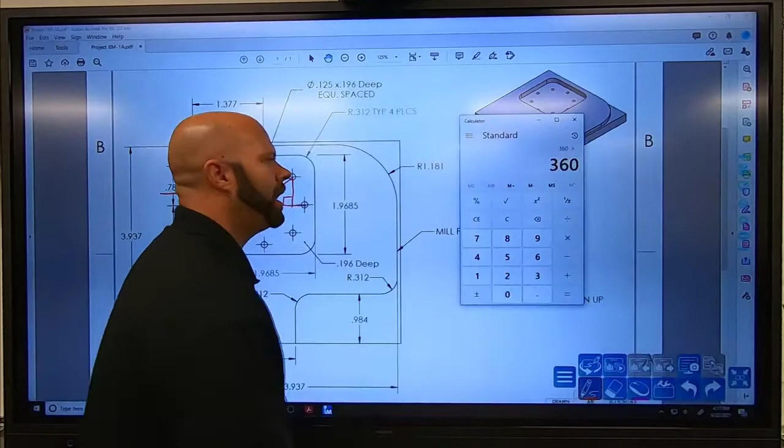So let's pull up our calculator and we'll say 360 degrees divided by how many holes I have on my bolt hole circle, which in this case is 8. I hit equals. That's a 45-degree angle from one hole to the next. So now that I know my big A, I'm going to do my trig a little bit quicker.

So what I'm going to do is I'm going to come down to a trig calculator, okay? So we already wrote down on here that my hypotenuse, my little c, is 787 thousandths, and my big A is 45 degrees. So on here, let's see if I can give it to me. On here, I'm simply going to come to my areas and I'm going to type in little c, which is 787 thousandths, and my big A is 45.

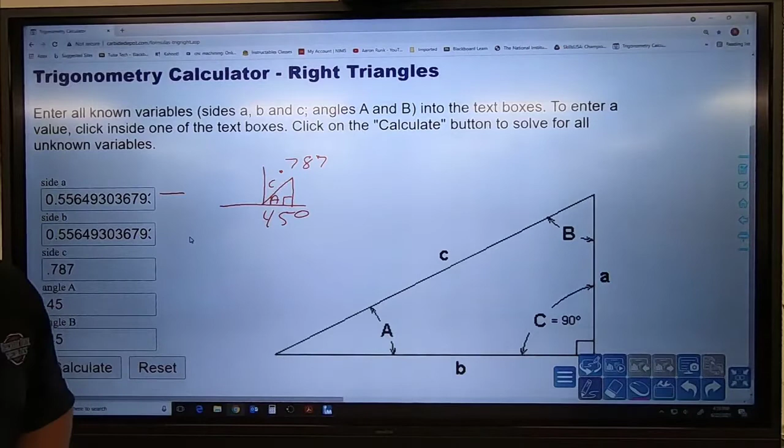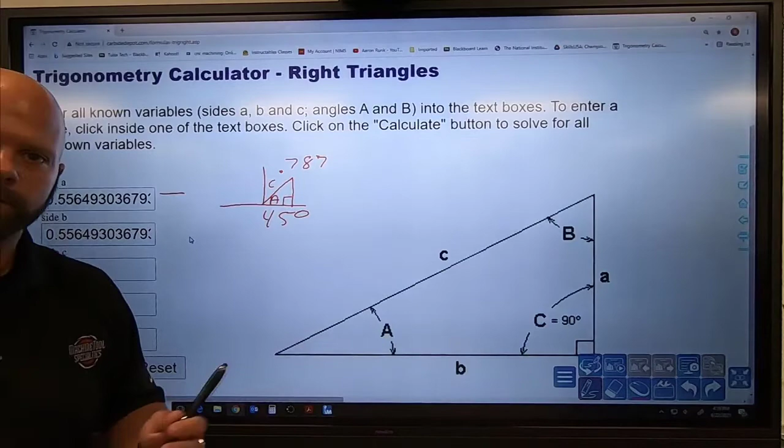I hit calculate, and now I have little a and little b known on those areas. And I'm lucky because guess what? They're both the same number. They're 556 thousandths and 4/10. Well, I'm going to round down, okay? So that way 556 is going to be my same number all the way around. That makes it a lot easier, okay? So let's come back to my print, and I'm going to type in that 556 thousandths all the way around my part.

So what I'm going to do is I'm going to type in my drill canned cycle. Now this is the third lecture where I go over how to do certain hole patterns along with the trigging of hole locations. So right now we are in the third lecture on how to make this part. So on my drill canned cycle, if I look at it, I want to start with a G81 because I'm center drilling. I'm not doing a deep hole. I'm just going to center drill.

So on the center drill, on a G81, I need 3 variables after the G81, which is my Z depth, which will be a negative value. I want an R, which will almost always be 100 thousandths above Z0, and then I need a feed rate. And for a feed rate, I'm going to put 20, so 20 inches a minute is going to be my feed rate. So my Z, well, how do I find out my Z? Normally, it depends on your center drill and how far deep you want to go. For this example, I'm just going to go a little bit past how far I need to go, so I want to go 50 thousandths.

I'm going to see if there's a number I can round up to. The depth of that pocket is 196 thousandths deep, so if I want to go 50 thousandths past that, it's going to be 246 thousandths. Well, I can go 250 and just round up, and that gets me pretty close. I'm not wasting any time, I'm not doing it wrong, I'm just doing it a little bit faster, okay?

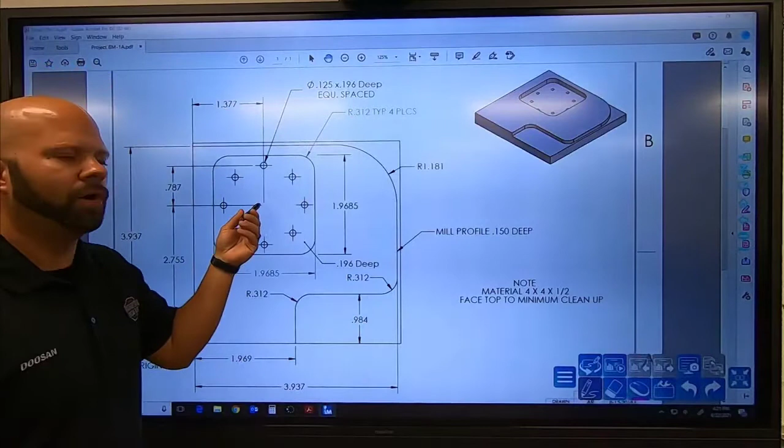So here's the next thing I want to look at. A G81, when it reads it, no matter where it's at, will execute that line. Well, I'm currently in the center of my pocket, but if you look at my print, I don't have a hole in the center of my pocket. So I don't want to be in the center of my pocket when I first run it. So there's two ways you can do it.

You can either go in a clockwise motion around my part, or you can do all the easy holes and then come back and do the 556 thousandths. I'm going to go ahead and do just one at a time in a clockwise motion. And if it makes more sense to do it the other way, that works as well.

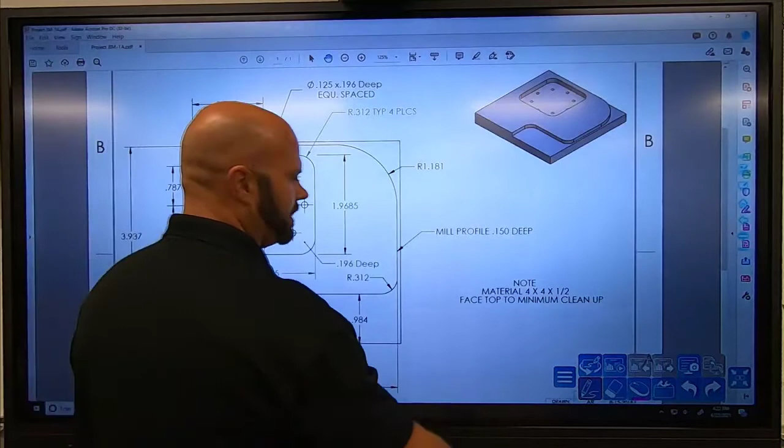Okay, so I don't want to go to X0, Y0. I do want to be at Y0 because Y0 is right there, which is directly across from my origin. But my X is 787 thousandths in the positive direction. So now when it reads that line of code, it will come down and put a drill point or a center drill right there.

Now let's go ahead and get around my pocket and get all those holes in there. So the next location will be X 556 thousandths, Y 556 thousandths, because I am in the plus quadrant. Once I type that in, I'm done. So it goes in there and pops another center drill because G81 is a modal mode.

So then my X will become 0 and my Y will become 787 thousandths, because I'm coming to X0, Y, the radius of the bolt hole circle. So that's why it's also good if you want to plot the hole locations of your bolt hole circle before you start going around, just in case it makes it simpler.

So then I'm going to be in the X negative quadrant, and the Y I'm still in the positive quadrant, 556 thousandths. And then I'm going to go to, again, X will go negative 787 thousandths, but now my Y is back at 0. So I went top, not the top left corner, I'm in the far left, okay? So X negative and Y is 0.

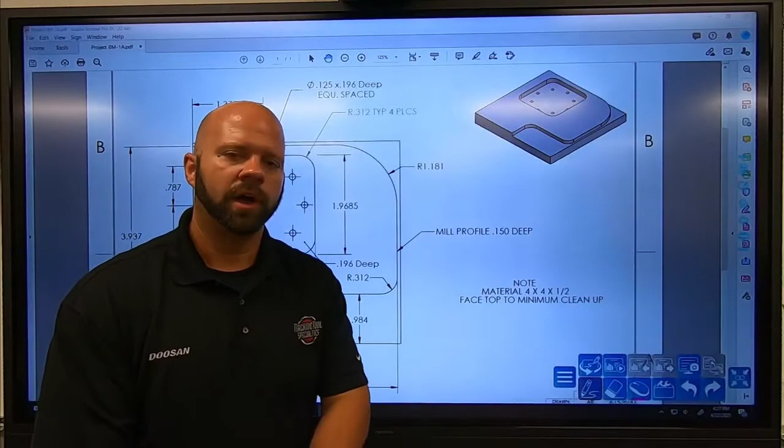We got to find out what the diameter of the drill is. I'm using a 125 thousandths drill, but this GD&T symbol for diameter is what I want to pay close attention to. That doesn't mean the drill tip goes down 196 thousandths below the pocket surface. It means the diameter of the drill goes down 196 thousandths below the bottom of the pocket surface. That's how deep it is to my pocket surface, and that's how deep this diameter needs to go below that surface.

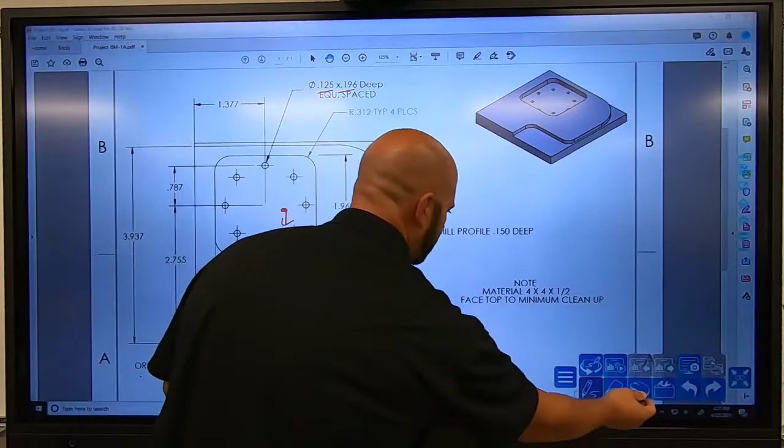So I'll do some calculations real quick while I'm here. I will do 196 plus 196, okay, equals. That's how deep the tip of my drill is going.

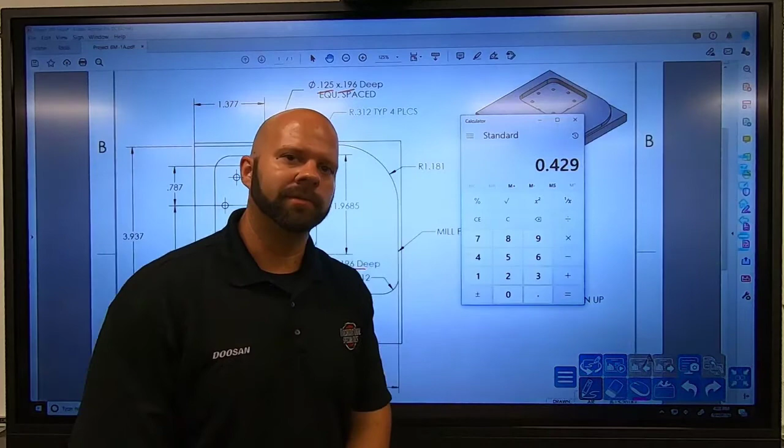But again, I want the diameter of the drill to go deeper. So in this case, I would do the diameter times 0.3, which gives me 37 thousandths, or I could trig it out to get the answer. So I will simply add an additional 37 thousandths. That means my overall Z depth from Z0, the top of the part, will go down 429 thousandths. So I'll come back to my part program and put that in there.

I like my spindle speed, I'm not going to change that. I like my X and Y start location. So this is a 125 thousandths drill. And then from here, I have to change the T and the H. So this will be tool 4, and the T has to match the H.

And then from here, like I said, we got to change that Z, which is going to be a negative 429 thousandths. And then I said we're going to change this to a G83.

And a G83 will need 4 variables, and we said that variable would be a letter Q. A letter Q is how far the drill pecks into the part. That'll look a lot more visually correct when you start watching in the simulation or on the parts. So what it does is from the R location, it will go down Q, R, Q, R, Q, R. The R stays the same, the Q takes it that much deeper each time until it reaches the Z depth.

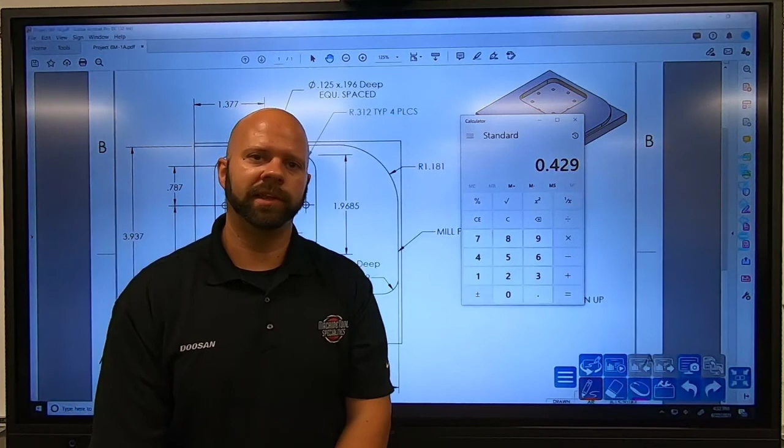So again, this is how to program a mill part from percent sign to percent sign. My name's Aaron Runk. Hope this video helps you. Please come see me if you have additional questions, or if you can, refer back to this video for questions that you have. Thank you for watching, and good luck.